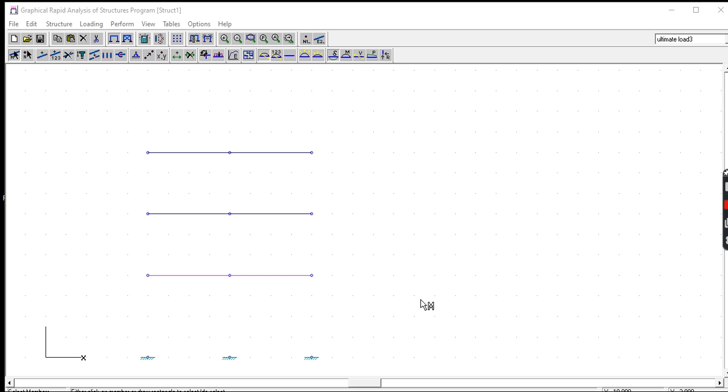Kay napalong og kadali. Okay, so as I have been saying, dili nimo ni pwede diretsohon ana, no? Kay dili man sila ma-connected ang joints. Okay, so let's say all. So kani, you have to delete this because I draw this nga gidiretso ra, no? So i-highlight nato ni using the select and unselect member, and then you're going to delete. Okay, delete members. Okay, then we do it again.

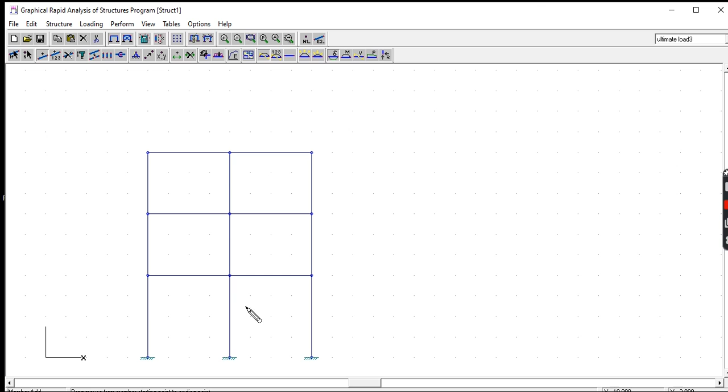So we add member, then we draw our member like that. Okay, so if you want to know the label of the members, click on View and then Member Number Labels, and then View Node Number Labels. So mo ni mga designations sa mga nodes and members.

Okay, so we're ready now to put in our loading. So the upper right hand corner, this one here, kinahanglan ang mga naka-highlight dire og unsa nga basic load case, mo na ang load nga imong i-apply dire. Okay, so we have applied the dead load, the live load. Sa bottom part wa pa day loading, no? So we highlight the member and then we put in the load. So let's say parehas ra sila 8 kilonewtons per meter.

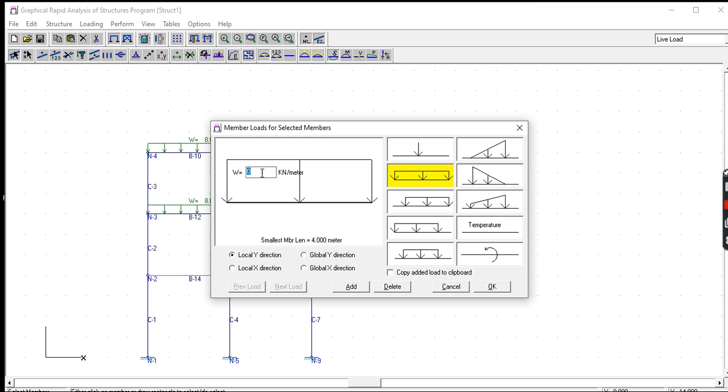Click OK. Okay, so we apply our wind load, and the computation of our wind load is acting on the joint, no? So pwede ra mag-act diri on the side as a uniformly distributed load, but we converted the uniform load into a concentrated load acting on the joint. Okay, so we click on Loading, Add Nodal Loads.

Okay, so at the roof deck from our computation, let's say the load there is 50 kilonewtons, going to the right. If the force is going to the left, you will place a negative sign before the value. So since to the right man itong load, so that's it, no? So in the lower floor, let's say the wind load computed is 60 kilonewtons. Okay, and the second floor, let's say 65 for example.

Okay, then this one here is the windward load, and you also apply the leeward load. So let's say 13. Parehas tanan. So, ang inyong computation, may inyong basihan ani pagbutang sa mga loads. Okay, so you have there your wind load. Okay, so click again on the

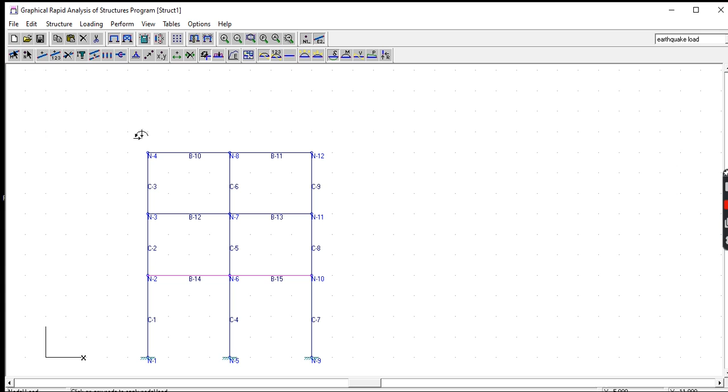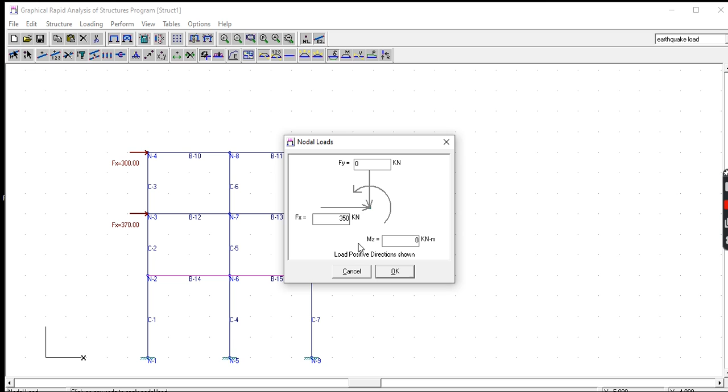earthquake load. So we apply our earthquake load at the nodes. So let's say this is 300. Sorry, 300. So this one here is 370, example. 350. Okay. So, ano yung atong mga loadings? So, complete na ta. Earthquake load, then the wind load, and then the live load, and the dead load.

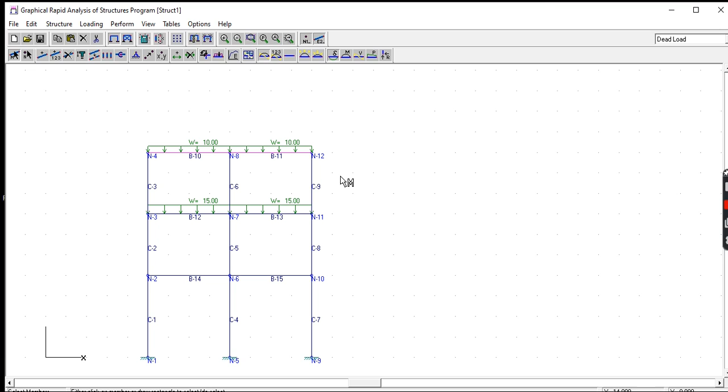Okay, so we are now ready to place the material properties. So, what is the cross-section of the members? So, click on Change Member Property. We highlight the member. Okay, this one. Control lang para maka-highlight sa member. And then click on the material.

So what is the cross-section of your beam? So let's say this is 500 by 300, then click OK. And then your columns,